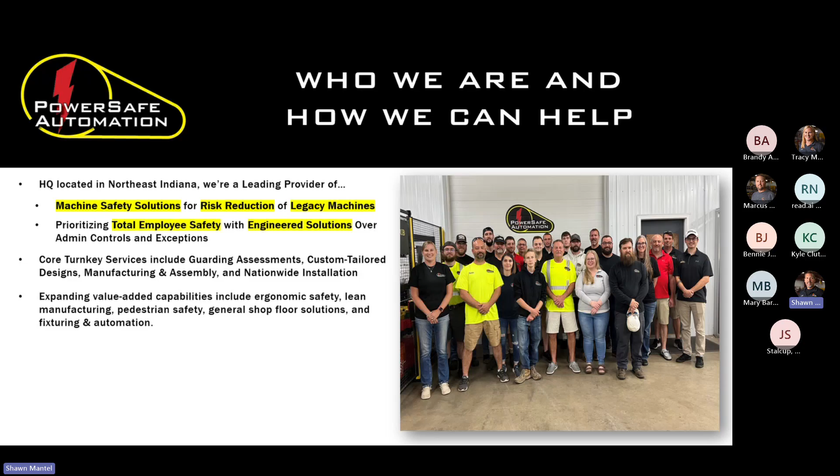And then we have expanding value add capabilities, ergonomic safety, lean manufacturing, pedestrian safety, general shop floor solutions, and some basic fixturing and automation. This all fits into the total employee safety one-stop shop for us. A lot of the things we use to design our guarding packages involve the same suppliers, products, and design software we use to solve other problems. So the support that comes with all of our machine safety, you'd get that same support from us, our suppliers, pricing structures, things of that nature all fit into that category.

There's a wide range of solutions you can find on our website. We have a full portfolio gallery on the homepage. If you scroll down about three-quarters of the way, you get to our gallery, and as of this morning there are 9 pages of applications. Each application, if you click on it, gives you a little write-up about where that might have been done and what it was used to protect—kind of an idea generator. Or maybe you have one of those machines in your facility and say, yep, this is what we want to look at. We also have over 150 videos on our website ranging from explainer videos, community content, automation content, and podcasts—a whole compilation on our YouTube channel.

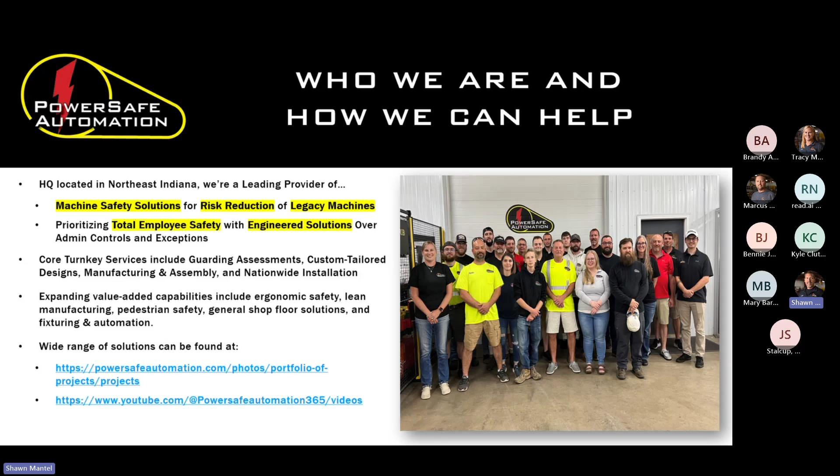We are recognized as a thought leader in the market. We've got published articles, and we're constantly publishing blogs, FAQs, and case studies. Those are all posted on our website.

We are a compliance partner with ISN and Avetta. There are manufacturing companies out there that have partnered with these third-party compliance companies to help vet out contractors. All of our safety manuals, OSHA logs, and insurance documents are loaded on these two sites, and we have member numbers with them, so it's easy to connect. That allows you—if your company requires either of those—to know that's something we're already a part of.

With everything going on with all the content out there, we've had some awards on some of the things we've done. We've been published in magazines, and there's all kinds of information on YouTube. We post on LinkedIn all the time, and it's all on our website—tons of information out there.

And then, obviously, the webinars that you've been part of. We've also been guest speakers virtually with other companies when the date for a scheduled webinar didn't work out, or they had their own EHS meetings and wanted a guest speaker—for example, pulling 40 different locations into one Teams meeting. Those are things we've worked with other facilities on.

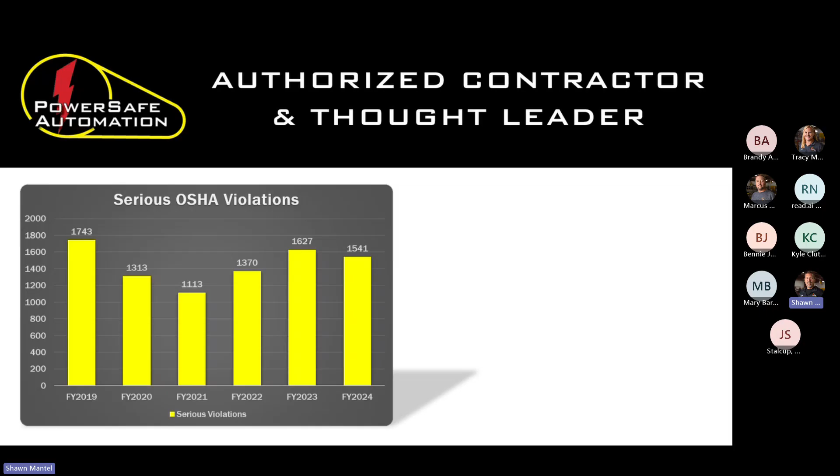I'd like to start with this also—this is a great chart we use to show other people that OSHA violations for machine guarding are still serious and still happening out there. It's in the top 10, and it could be serious—lacerations, fractures, amputations, maybe death. Unfortunately, that does happen out there. We're trying to be more proactive so we don't become a statistic on this chart. That's why I like to show this, so we can ask what we can do ahead of time to avoid becoming part of that statistical number. Once 2025 has finished, we'll expand this chart. Something to keep in mind: just because OSHA hasn't been in your facility, or no one's gotten hurt yet, doesn't mean your facility is safe. So keep that in mind when evaluating the safety in your facility.

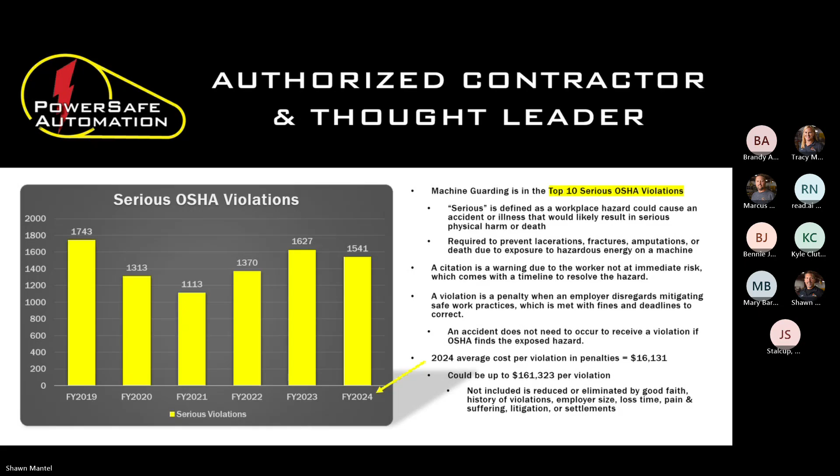So I want to start with our services, and then we'll get into the products. Collaborative on-site guarding assessments. Basically, the way this works is we do a Teams call to discuss your needs and schedule an on-site visit. So what we can do is set up a Teams meeting.

We talk about what's your scope of work, what's your directives. Was there an injury? Was there not an injury? Trying to be proactive. What kind of machines do you have? How many machines do you have? Who's going to be involved, and then we talk about what that site visit is going to look like.

We want to know what the goals or your directives are. Obviously, the goal is to protect your people, but is it let's get the guarding done first and then we'll put the electronics on later, or we want to do one machine at a time just to build a proof of concept, or we got to get all 20 machines done by the end of the year.

So we talk through all of that when we come on site. Tour the facility, understanding your environment. Is your environment a rough environment where we have to take that into consideration with some of the designs or the type of products that we use? Is it something that is not rough, a little bit cleaner? So we need to have a little bit more effort put into the aesthetics of the guarding.

And then convene at the machines with the maintenance, safety, and operators. One of the things that we prefer to do is to collaborate with that whole team. We do not like to do guarding projects if we do not get to talk to operators and maintenance.

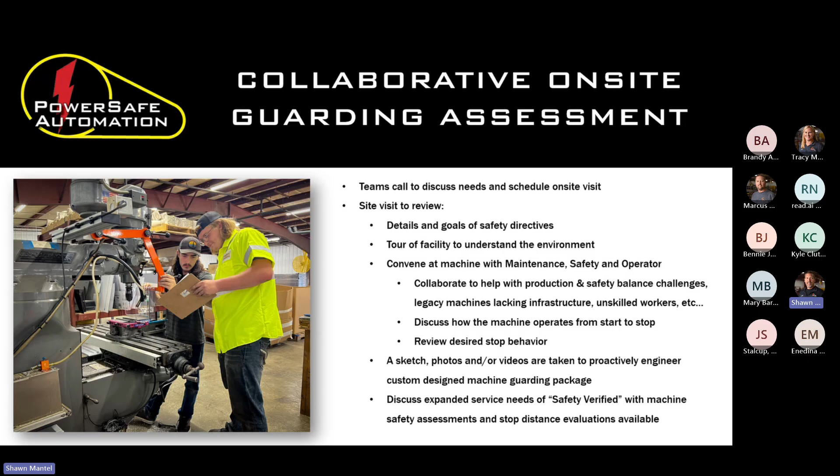From there, we take that back. You can see up here that's the sketch that we will take while we're on site. We'll kind of conceptualize what that's going to look like, take some measurements, and then we're going to put it in a CAD system, and we're going to produce a 3D drawing of that guarding for you.

And then we're going to put together a PowerPoint that's got the pictures of your machine, the scope of work, any CAD models we're going to use. We're going to do this machine guarding, and there's going to be 4 switches or 6 switches. They're going to be locking switches. They're going to be tied to an emergency stop, or it's going to be 0-speed feedback from a PLC. Whatever that scope of work, that'll all be put together in a PowerPoint for you.

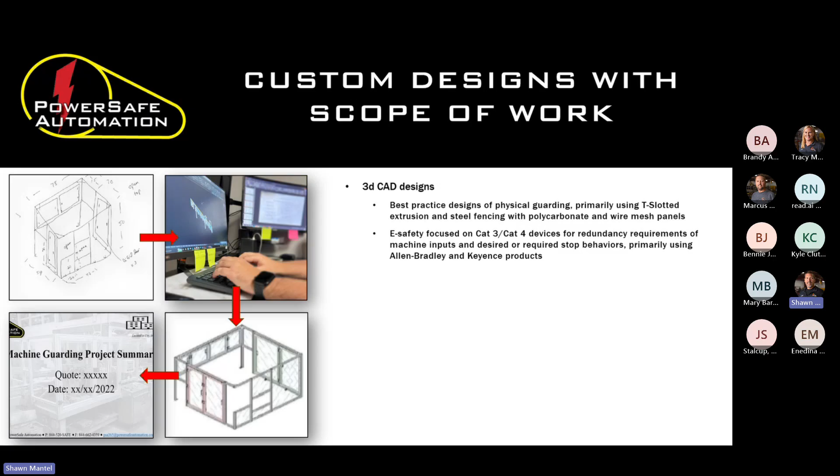And then we will put a quote together that will have all of the materials that is needed for that. And then we will also put together a quote that has installation and integration on that same document, and some optional spare parts. If you want to put something in the maintenance department, maybe you want to have a couple switches in case they fail, maybe a set of light curtains because the forklift driver is going to hit it, or the corner of your guard, or someone is going to run into the wire mesh and we got to replace that. So we can sell some spare parts to you for emergencies, and then some electrical schematic deliverables for any future troubleshooting that you might need to do.

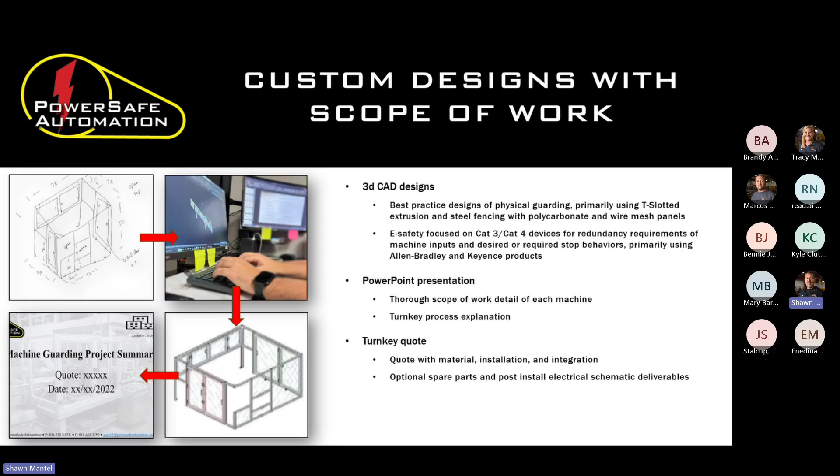And then from there, we proceed with those designs. We do all of the cutting, machining, fabrication in-house, saws, drilling machines, milling machines, grinders, shears.

And then we have a project assembly department. Once it comes through the manufacturing facility, then it gets kicked over to our assembly department. We assemble either fully assembled or sub-assembly, depending on how it needs to either ship to you or come to you on in our job trailers to reduce the time on site. We don't put kits together on your floor. A lot of times your space is too tight, or the time on site we need to keep reduced, so your downtime is that lower, and we don't get in your way. I don't have to worry about forklift traffic. So we build sub assemblies in our shop before we ship that out.

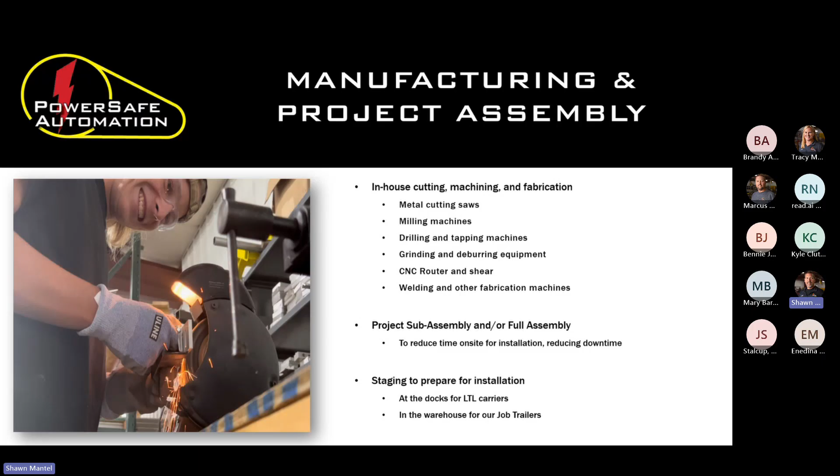And then we stage everything. We've got docks for LTL carriers, and then depending on the size of it, maybe it can fit on our job trailer.

For installation, we do go nationwide installation and integration. So we will install the machine guarding and also tie in any of the electronics. So we've got nationwide coverage.

Everything comes out of Northeast Indiana. We have multiple field crews. Right now we have 3. We are getting ready to launch a 4th crew. Everybody is outfitted with trucks and trailers, toolboxes, packouts for all of the mechanical guarding, all of the electrical supplies and tools for integration, and inventory in the trailers for any what we call as minor field fit. So if we need to shore up some gaps, maybe tie the guarding back to the machine for stabilization. All of that stuff is equipped in our trailers, and each crew consists of a site supervisor, a couple mechanics, and an electrician or controls engineer, and that's all outfitted in the truck and trailers.

And then isolated safety enclosures. Anytime that we install projects, we will build our own little safety enclosure for all of the electronic safety devices, so that saves time when we're on site. So we don't have to worry about finding a location in your box. Is there room in your control box? Is the wiring a mess because of the age of the machine? Is it dirty? So we will build our own box, and that saves time on site as well, doing the integrations.

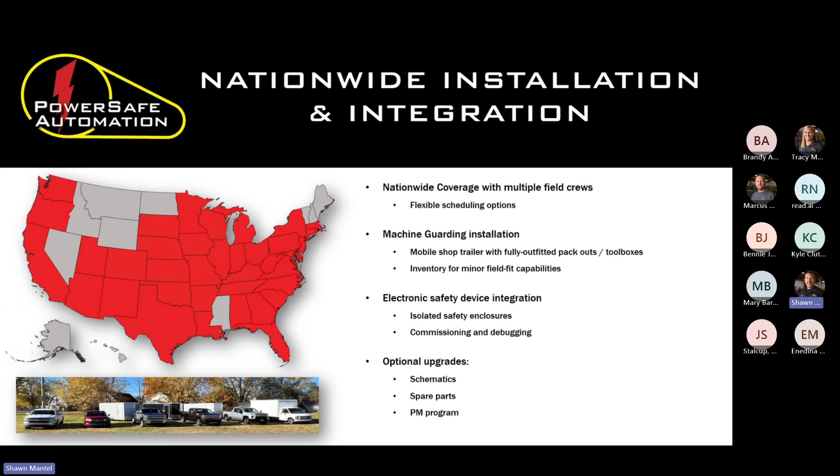And then optional upgrades, as we talked with the quoting, schematics, spare parts, and then a PM program. So the PM program would be preventive maintenance program, depending on your location, whether it be cost effective for you or not, or if you do this coupled with another project.

Preventive maintenance, as we've talked in the other webinars, is everybody does PM on their cars. I'm going to do an oil change. I'm going to rotate my tires, repack wheel bearings. I'm going to change my brakes. But guarding sometimes gets neglected in those cases.

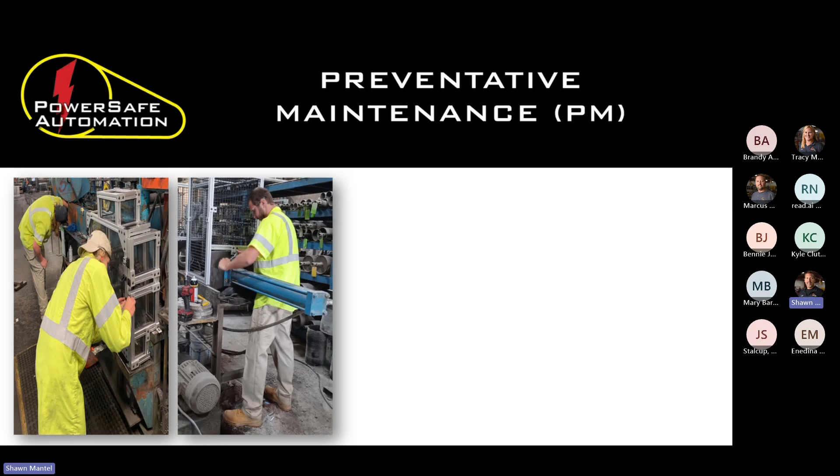So you want to make sure you're checking, tightening the bolts. You make sure that no one's cut open the panels to make it easier for adjusting the machine. Make sure nobody's hit or damaged anything. Make sure the panels are clear so that you can still see through them, or are they hazy because somebody used the wrong cleaner to clean off the plastic panels. So you want to look at whether you do this yourself or contractors for that. I would continue to recommend putting your machine guarding on some sort of PM schedule.

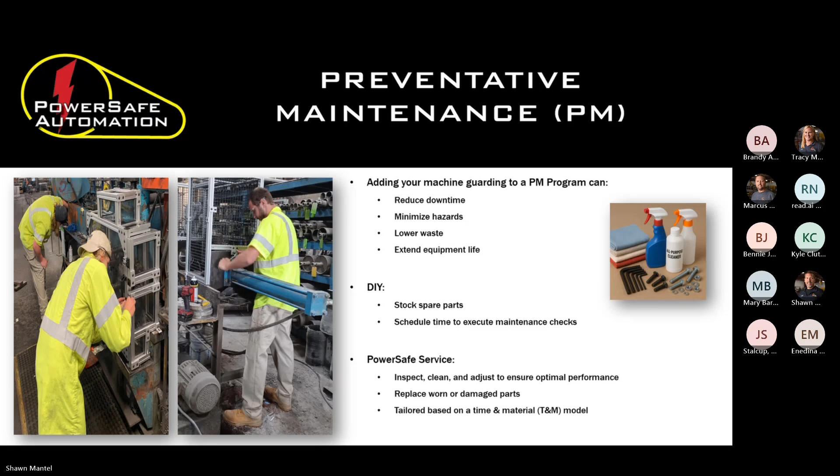Then we'll get into the different types of machine guarding now. It's a full range of products and types of machines that we do. We'll start with the physical machine guarding solutions.

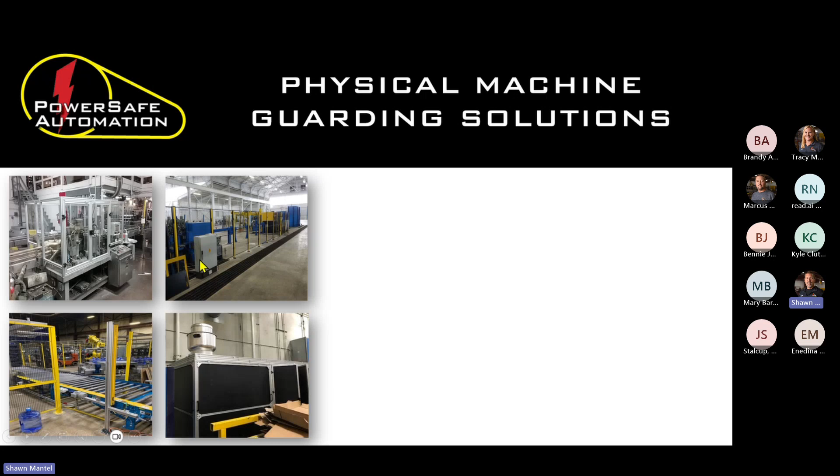So machine enclosures, perimeter guarding, sound enclosures. We can do just about any type of guarding, whether that's custom or we're just going to put up a fence. You can see how much that custom fit is with the extrusion.

So we've got different types of products for different types of applications, but we know that because it's aged equipment, everything's going to be custom. The layouts are going to be custom. Maybe you've added extra conveyor systems, or maybe there's a certain fixture that has to go through a tunnel. So we take all of that into consideration when we're designing these guards.

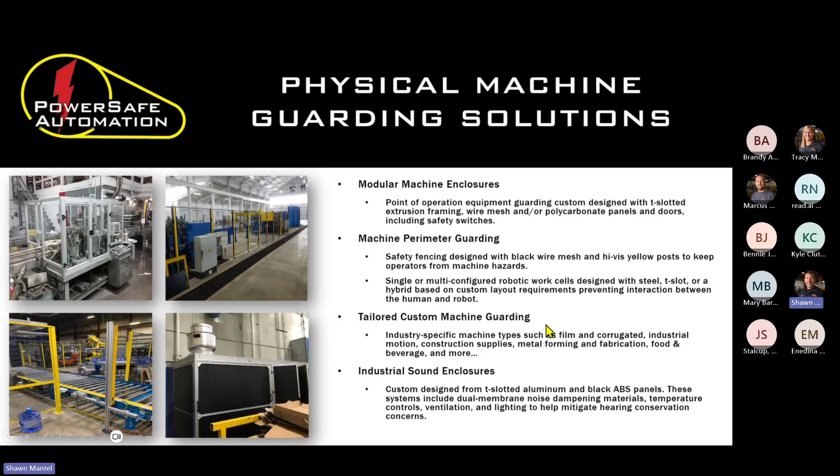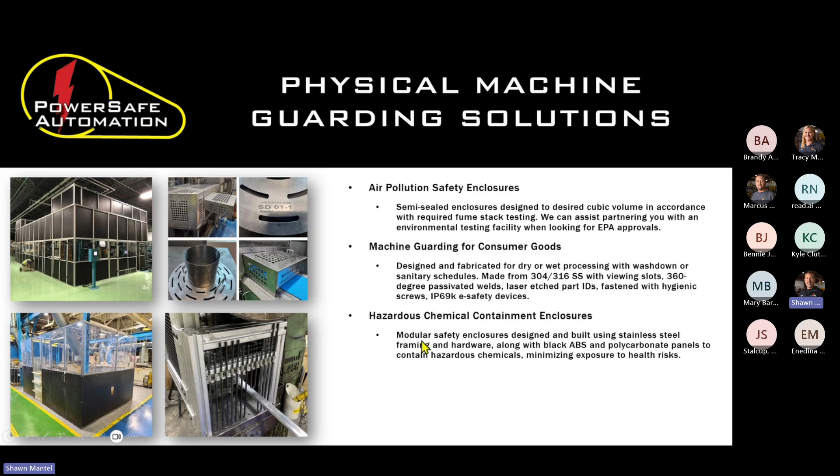Hazard chemical areas, if that just needs to be stuff that can withstand some hazardous chemicals, but doesn't need to be a sealed enclosure or doesn't need to be an exact fit, we can do those. And then we get into some shear and press guarding with some adjustable bars for different shapes that are going in, being formed into your press.

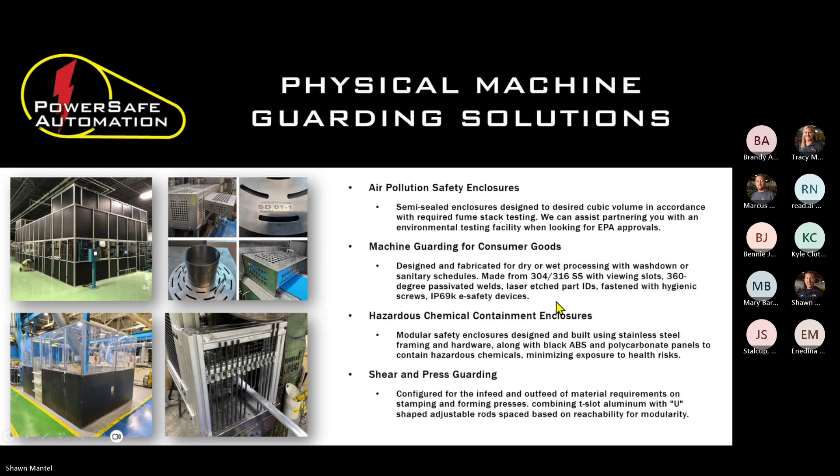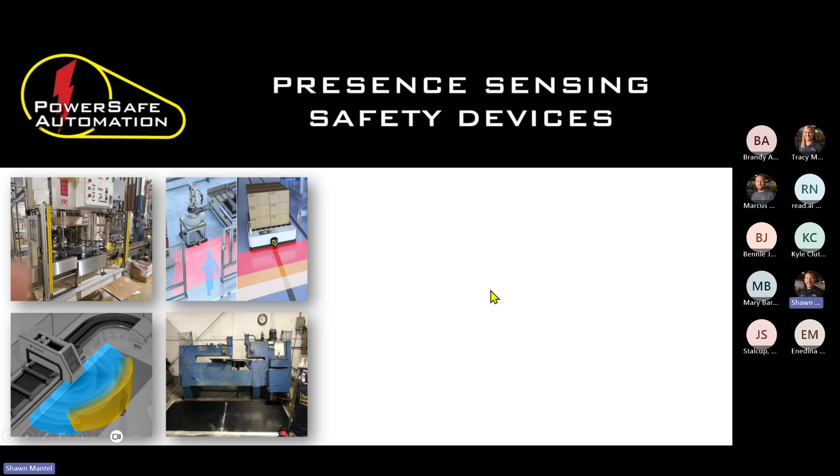And then for those, you want to basically turn those machine guards into a smart guard by adding the electronic safety devices so that the devices then can talk to the machine and not the human make those decisions. So we offer a full range of presence sensing devices, safety light curtains, safety laser scanners with stack light for notification, 3D safety radars, and then safety mats and edge guards.

The light curtains and scanners that we use primarily are Keyence brand. Most people know who the Keyence folks are. If you want something else, we can get just about anything. But I want to caution you, if we use an off-brand for us, the support for lead time, pricing, technical support, inventory is not going to be as great if you use something else. So Keyence is the brand for those devices.

The safety radars is Inxpect. You may see other brands out there like SICK. SICK is actually private labeling the Inxpect safety radar. We work directly with Inxpect. So they've basically created the technology for these radars. So we work directly with them on the engineering and applications.

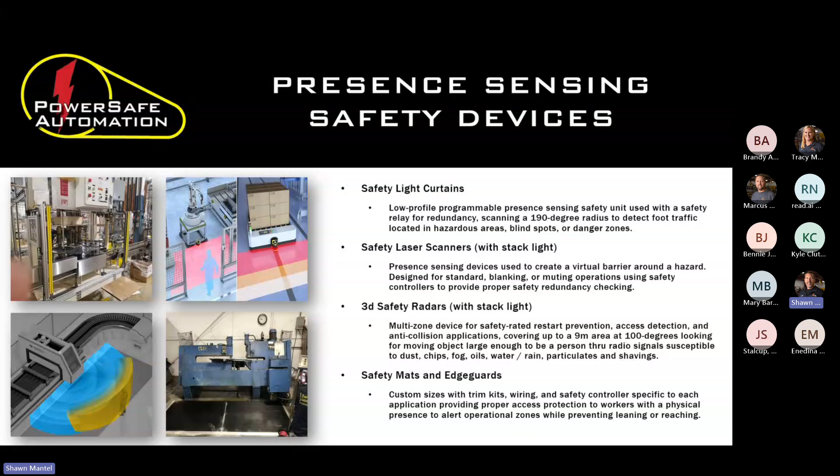And then safety mats, we've got a couple brands. Our main one is Recora. We've used Pinnacle. So we've got brands that we prefer to use, but we can have those discussions of what that's going to do if there's a particular brand that you have set a standard on.

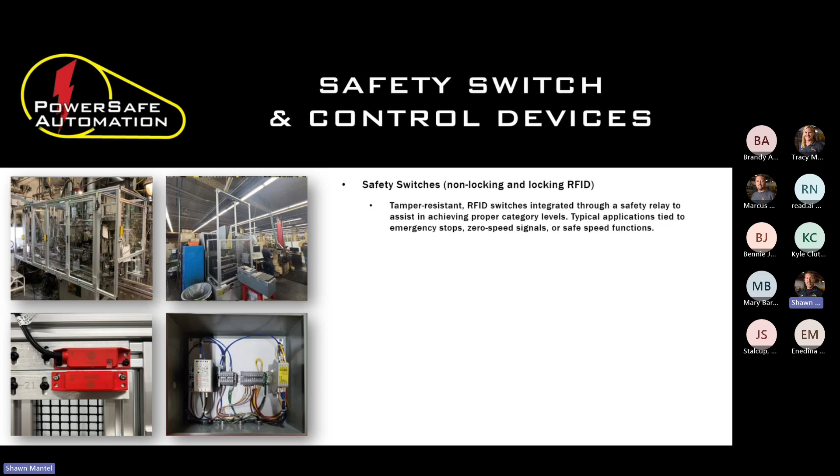And then we get into safety switches, locking and non-locking. We use Keyence and Allen Bradley, two of the top names again out there. And then one more thing on the safety switches. Most every safety switch we do is an RFID safety switch. We don't quote in magnetic sensors or the tongue sensors unless it has to be some sort of intrinsically safe area where it's got to be a dry contact or low voltage. Most everything that we do is RFID.

Then we get into some speed monitoring safety systems where if the door needs to stay shut for, call it 10 seconds or whatever that time is, machines take time to slow down. They're old machines. They may not have brakes on it.

So we look at how do we control that before we allow an operator to open the door. Trapped-key interlock systems - this is a mechanical key system where the control key at the controls disconnects the power, and then it's a group of mechanical keys used for entering each of the machine guarding areas. And as mentioned, the PowerControls safety enclosure we create for your machines with the power supplies - maybe you need to step down your voltage because the devices we're using are 24 volts. Safety relays, all the monitoring devices, everything you need, reset buttons - we put in these cabinets.

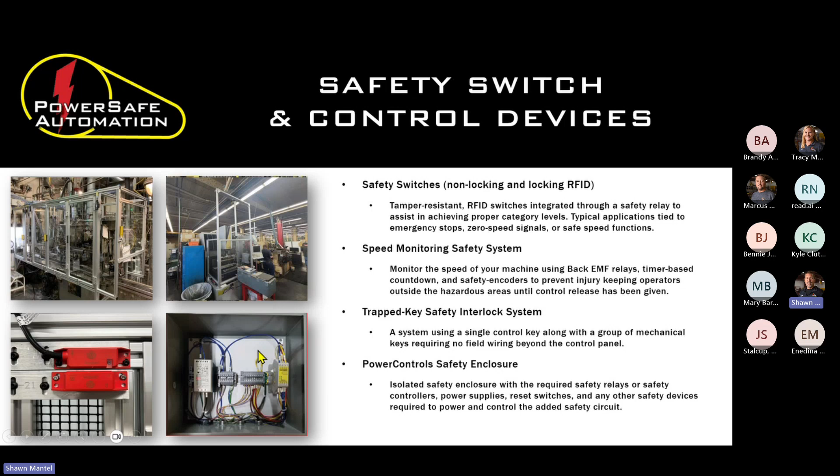Then integrated machine safety controls. There's operations, processes, procedures, age of machines that may require something that's just not plug and play. 80% of the applications out there, you can probably throw a guard on it, put a safety switch on it, and tie it to an emergency stop or a drive motor or something of that nature. But there may be areas where we have to do a little bit extra to the machine, or you have to do something to the machine so that the guarding isn't the end all, and then the operator is upset because they can't do their job.

One of the areas we get into is intrinsically safe systems. This would be an explosion-proof type system where there's low voltage, dry contact switches, the proper wiring and conduit, and safety barriers from the machine. This is found in a lot of chemical facilities and aerosol can facilities. So those are things that we can help out with.

Vertical safety doors - floor space is getting to be more and more of a premium, so we're able to do doors in the vertical application. We do things with our doors to make sure we can ensure they stay in the up position with different types of check valves or rod locks, proximity sensors, safety valves. So we can work through those applications if it's space saving, or maybe it's just something where it's a lot easier for the operator to let the door come up and down on a cylinder than to try to open and close that door every time.

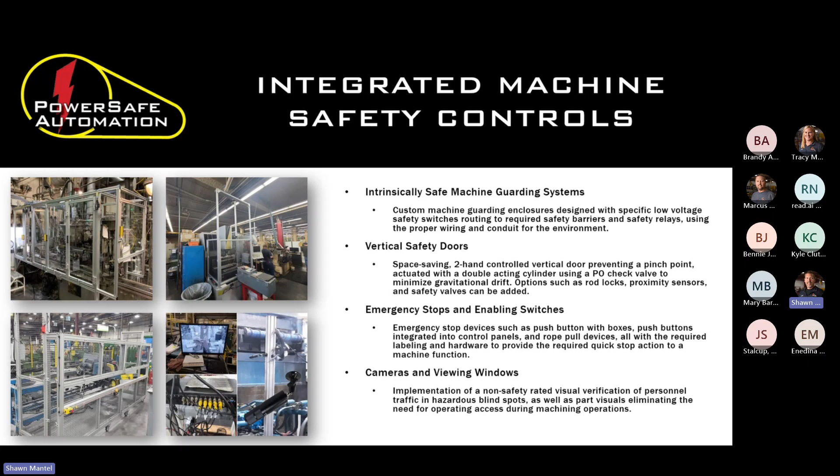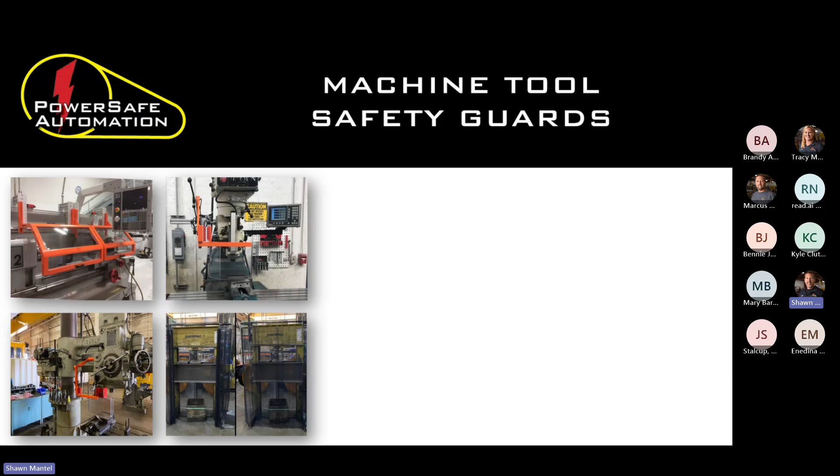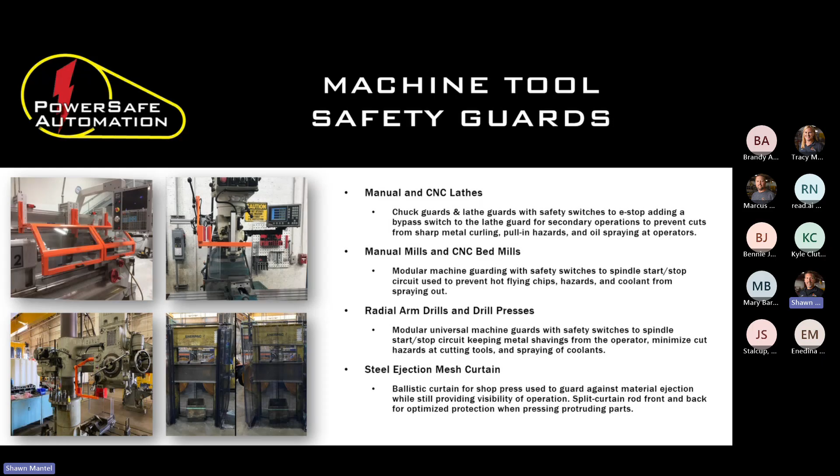And then we get into more common machines found in maintenance departments, tool rooms, tool and die shops - your manual mills, lathes, drills, drill presses, shop presses. We've got standard packages - I'll call them standard, using air quotes, because there's a style of guard used on these machines, but you still have to customize it for that machine. But they are, you can see, still user friendly even though they're manually operated machines in a lot of cases. I was a machinist in my career, and I understand, standing in front of this machine, that guard is not going to stop me from doing my job.

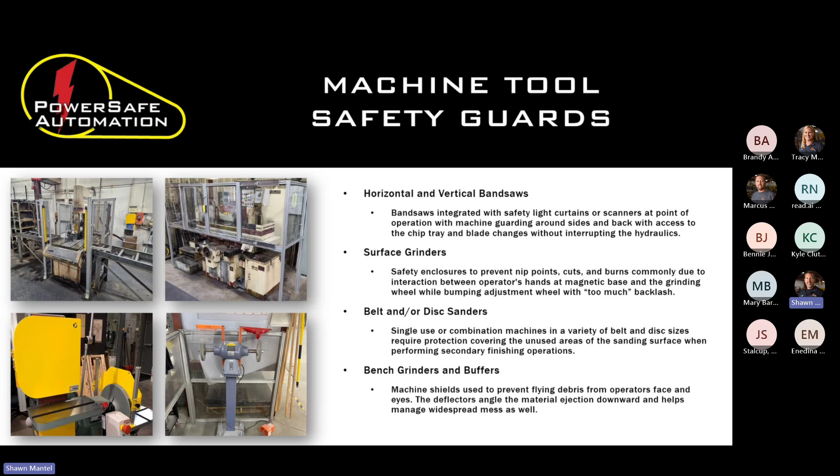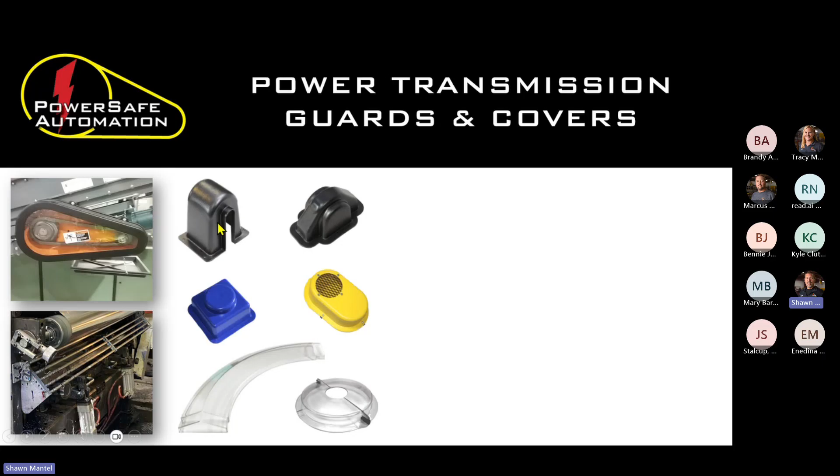And then we've got power transmission guards and covers. When we're talking about belts and chains, you're talking rollers, end of conveyors where you've got end shaft bearings. Maybe you've got a motor that you need to cover because of the rotating shaft. Those are all different types of covers that we can produce for you.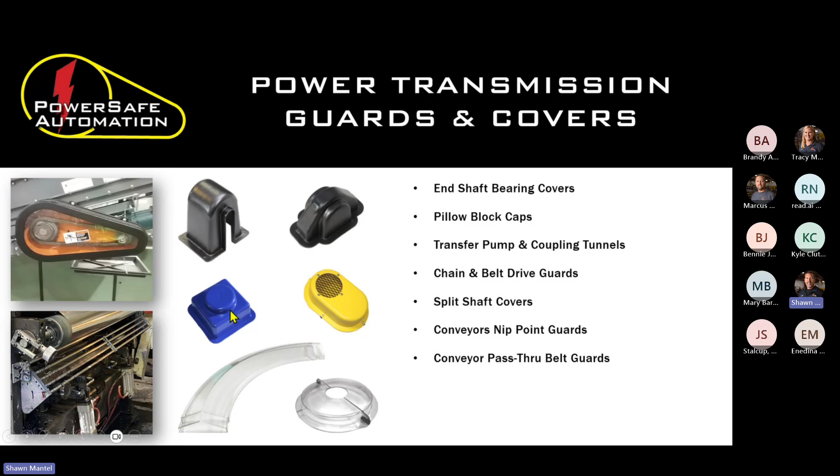They're all going to be custom sizes. But there's a whole different array. It could be a 4-bolt pattern, could be a 2-bolt pattern. But those are things that we can also help you with.

And then from that assessment, we're going to do custom tailored designs for that, keeping in mind we're reducing the risk. We're not looking for full compliance, because on legacy machines there's a good chance if you try to go full compliance, it's going to be a full cage with padlock and you won't be able to do your job. So it's either going to be some administrative controls on your part, or can we automate it in any way?

Can we put some fixturing in there? Can we do some no-touch tools? Can we put a cobot or a robot on the inside and not let the operator go on the inside? That will be an engineered solution that does bring you closer to compliance, but the designs without an automation upgrade to your machine are going to be for risk reduction measures.

And then you manufacture and assemble the product, all the guarding that is going to be needed for your applications. Installation and integration - this is where we're going to take everything that we just assessed, designed, built. We're going to install it.

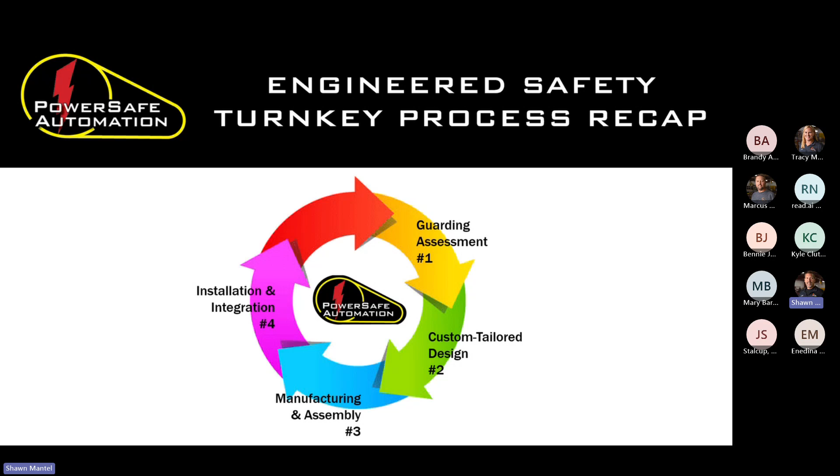We're going to do some field fits. We're going to shore up some gaps. Maybe we're doing a proof of concept. Maybe you have 6 in a line and you want to do 1, and then we can make that one proven out for the operator, for the safety, for the maintenance, when we tie everything in, and then do some preventive maintenance as time goes on to make sure that everything that you've done in this is not cheap.

There is a cost to doing safety. There's a bigger cost to not doing safety, but you want to make sure that it all stays in place and you take care of the guarding as much as you do with taking care of your machines. And then you just start the cycle over for the next machine, and the next machine, and the next machine.